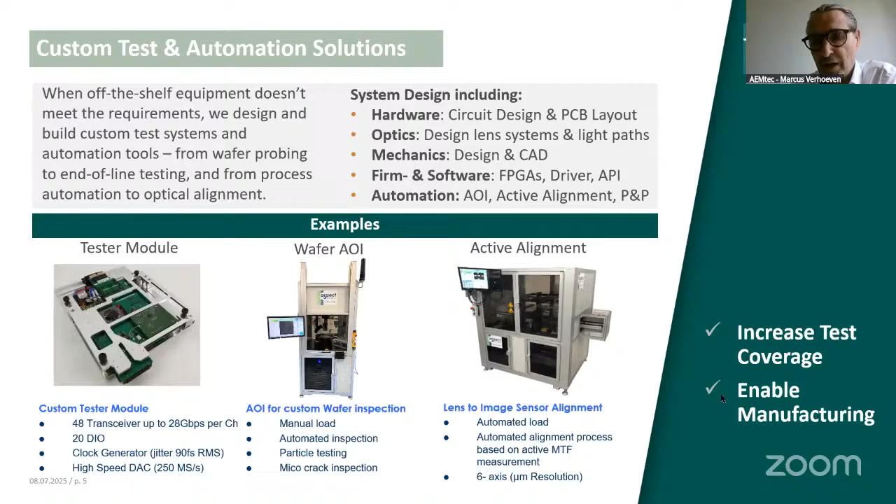This is based on a Bosch conveyor system. So on this conveyor, two components come along, a camera board and the lens. Within this machine, we pick these components and align the lens against the camera module. Then there is a gluing process and end-of-line testing, and then it comes on the conveyor out of this system. These kind of solutions are supported to increase your test coverage and to enable automated manufacturing.

Next area is engineering services. So we help our clients to develop their products. This could be just in the area of firmware development, but quite often we help clients with new ideas. In this example here, our clients had an idea to realize a new detector system for proton therapy, and it's a huge data rate we have to handle. In the overall system, we have 24,000 strip detectors. Each is sampled with 1 gigasample per second. So aggregated, we have to deal with 24 terabits per second. It's not possible to transfer this amount of data directly into the PC.

So in these kind of development projects, we realize all the necessary PCBs, the mechanics, the chip-on-board technology. We debugged and wafer tested the ASIC. You cannot see, it's below this metal bar here. And then all the necessary firmware to extract the raw data and transfer it to the PC.

Okay, all these design services are to help and enable your technology, and two key focus areas to help our clients here are that we keep an eye on design for manufacturing, that we enable manufacturing with high yield, and also design for test, of course. Okay. The last area is our product.

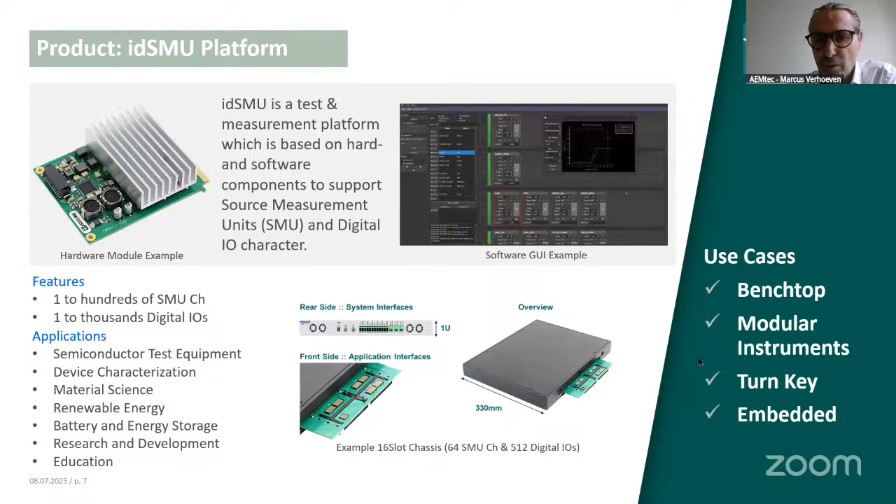This is a kind of baseline in testing, to have these kinds of instruments and a huge amount of channels. So in some test configurations, we have hundreds of source measurement units or thousands of digital IOs. Use cases: benchtop, modular instrumentation, or turnkey solutions. That's it from my side, and I don't know how much time we have to answer your questions.

So yeah, we have time for questions. You can use the chat box or raise your hands. I have perhaps a first question. You mentioned design for manufacturing and design for testing. What's the difference in the concept from your point of view?

So in many areas, when people have new ideas for new products, the focus is strongly on the functionality of your new idea. But when it comes to cost-effective production, these two areas, design for manufacturing and design for testing, are very important, that you take care in your system design that test cost is low.

And when you look at complex assembly processes, if in your design, for example, you go to the edge of the design rules, then the risk of yield loss is quite high. And with the services we provide, we know our technology, and we can help the client improve the design so that you can have cost-effective manufacturing.

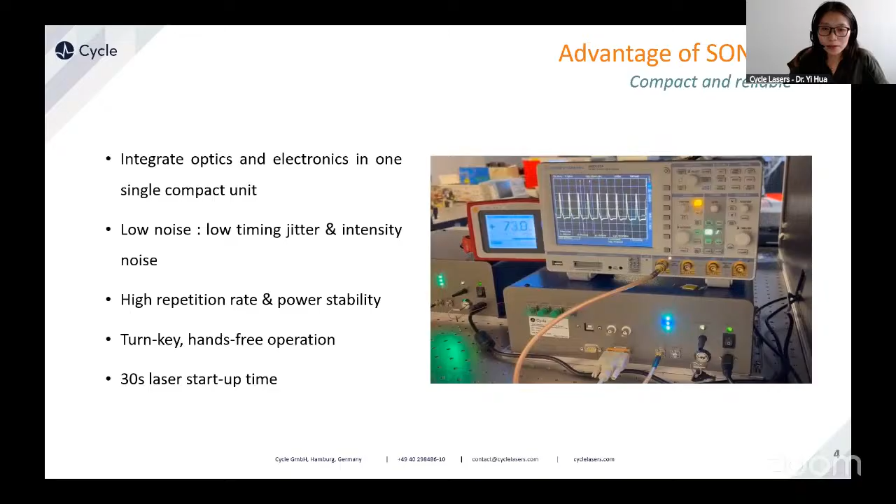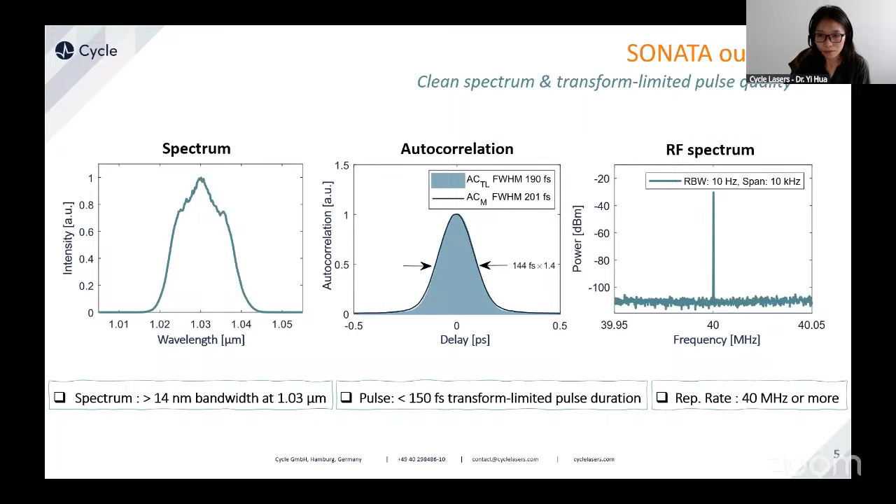Here we do some measurement for the free running repetition rate drift. We use the frequency counter to see how stable the repetition rate is. So we do a logging for 10 minutes. And we find the standard deviation of the repetition rate drift is only 0.3 hertz, which means it's 0.03 ppm at stable room temperature. When I say stable room temperature, actually our lab is plus minus 1 degree. So within plus minus 1 degree, the repetition rate drifts below 1 hertz in 10 minutes.

But if we do longer logging for the repetition rate, it's drifting from 0 to 5 and drifts back to 0. This is most likely due to the fluctuation of lab temperature, but it's within the range of 10 hertz, which is 0.25 ppm at room temperature. And with this very small drifting, the laser actually is very easy to be synchronized and locked to any other lasers.

And here we also measure the power log of the laser output, and we find the power fluctuation is below 0.05% for logging of 150 hours. And for the short-term intensity noise, we measure the laser intensity noise with the signal source analyzer with a fast photodetector. And as you can see, the integrated intensity noise from 10 Hz to 20 megahertz is 0.025%. So this is very low noise as far as I can understand.

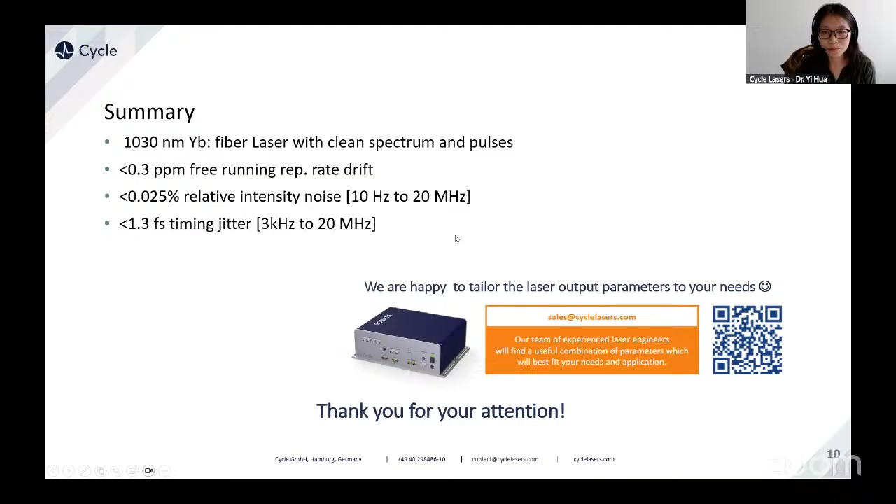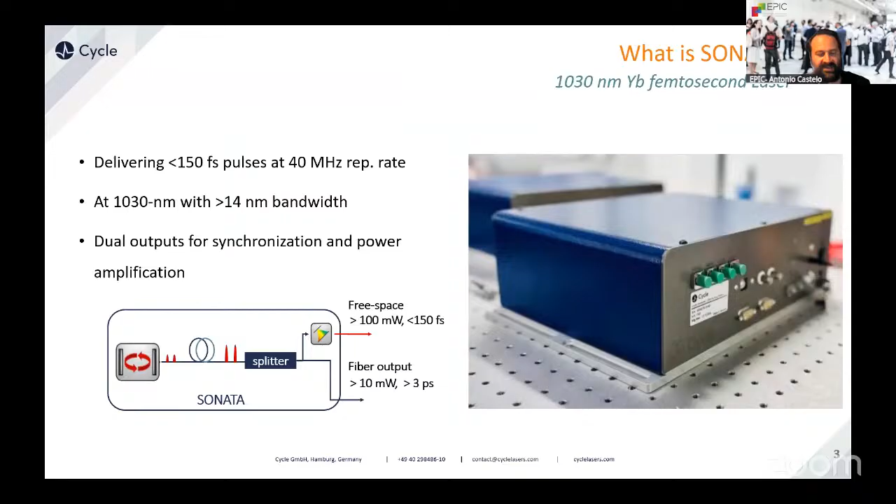I have one question regarding the use of the laser. If you go to this kind of facility with a free electron laser or synchrotron, could your laser also be the substitute of one of the existing seed lasers, or should it be a new configuration where your laser is integrated from the beginning in the, let's say, structure of the whole laser?

No, so for large facilities, usually we have a lot of lasers which are commercial. Most likely we also do our own development for, like, high power pump-probe lasers. But the seed laser is usually commercialized. They use the seed laser for seeding the high power pump-probe laser. But the seed laser can be easily replaced because it is low power. It only offers the power needed to be amplified.

So to switch the laser is not really a big problem, because this is just a small part of the facility which they usually also just purchase from other companies. So this is what we're developing for, because we had some problems beforehand with some laser systems which don't work so reliably, and we are developing timing systems for large facilities, and we also want to have a reliable laser to work together with the timing systems. That's why we need to have a low noise synchronizable laser.

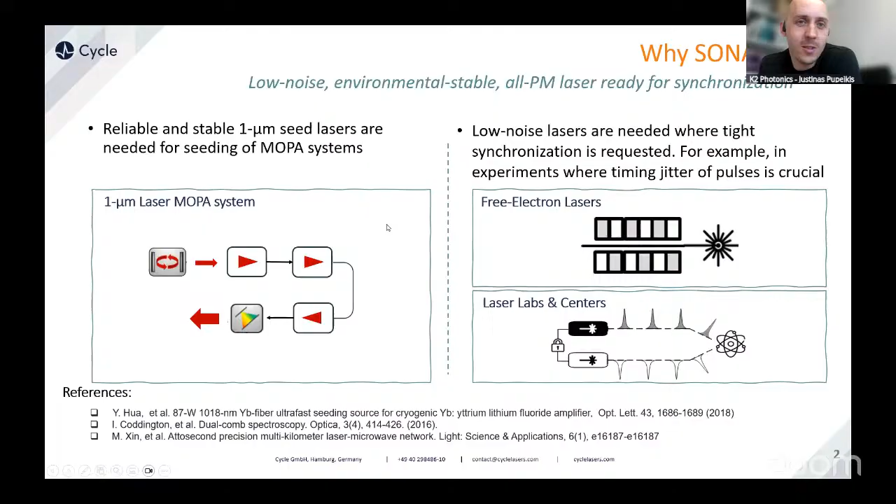So just, what does the application need? Like you showed these noise specs. Is it orders of magnitude too good or not good enough? I'm just curious, where are we standing with this femtosecond? Is it high or low? I would say it's already low enough, but I can't say this is a record low, but you have to consider noise is one perspective.

So where our laser is, I think this is similar to the record timing jitter, but also a lot of publications have attosecond timing jitter measurements, which from my understanding come from the noise floor of the detector during locking. As you can see, there's an S-curve of the balanced cross correlator. Sometimes people lock to the flattened area of the S-curve, which gives attosecond timing jitter, but I don't think this is a real timing jitter that can be measured. So with publications you have to be careful, because some data is not really so trustworthy. But I will say this jitter is already low enough for any application in a large facility.

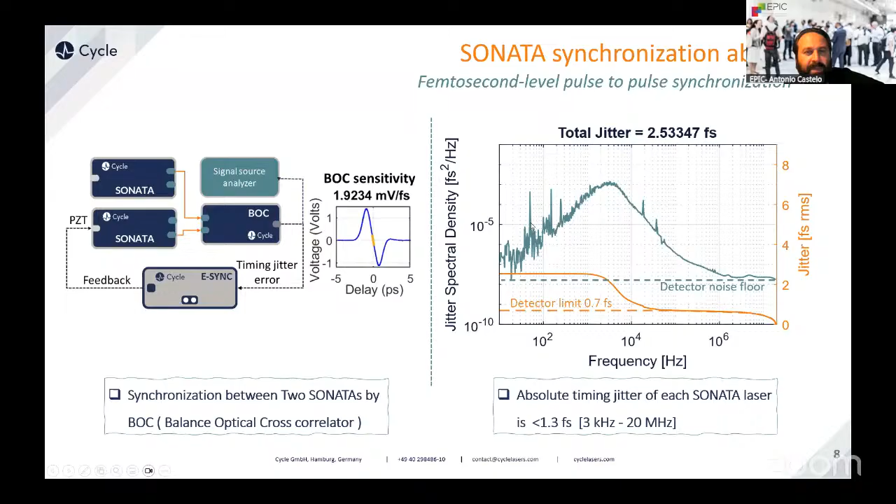So we have Diego Ormaechea. He's a technical sales engineer at Imagine Optic. Imagine Optic is a very well-known company. Adaptive optics is, I think, the key word for them, different metrology solutions. And he's going to present today the MESO solution for planar parallel optic testing. So Diego, the floor is yours.

Hi, everyone. Can you hear me? We can hear you. Okay, can you share your screen and your presentation? I'm trying. Good. Okay, so hi, everyone.

I'm Diego from Imagine Optic, and I will introduce our latest metrology system for optical components characterization. So, a brief introduction of Imagine Optic. We are a French company based south of Paris with between 60 and 70 people, and some offices in China, in the United States, and in Bordeaux. We also have some distributors all around the world, and we are quite proud of two figures. We have delivered more than 2,500 wavefront sensors and more than 100 deformable mirrors for high-power lasers.

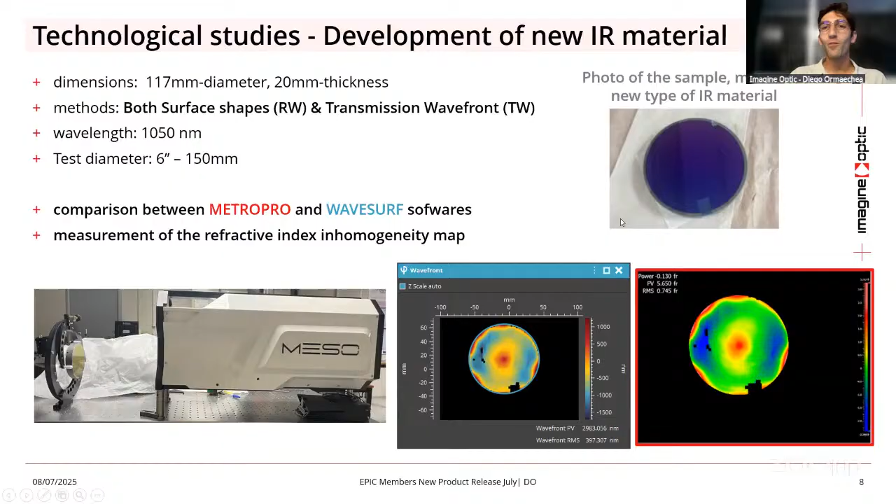On the top right, you can see the sample, and bottom left, the setup. In the middle, it's the wavefront measurement coming from the MESO. We have an export feature in order to get a file compatible with MetroPro software, which is the most common wavefront analysis software. And that's it.

Then MESO can also be interesting for nonlinear crystals and laser crystals after coating. Sometimes you are not able to measure with the standard wavelength of these kinds of Fizeau interferometers. So here we measured small cubic KTP crystals, 9 millimeter square cubes. The wavelength is 1064 nanometers. We can control the polarization if needed, so linear vertical, circular, or linear horizontal.

And for a French laser crystal manufacturer, we developed an add-on to our software in order to measure a batch of different crystals in one single measurement. You can see in the middle the raw camera signal of the measurement. You can see or guess 4 cubic crystals. And in one single procedure, you have access to 4 different wavefronts for the 4 different crystals. So you can measure a high number of crystals with just one measurement.

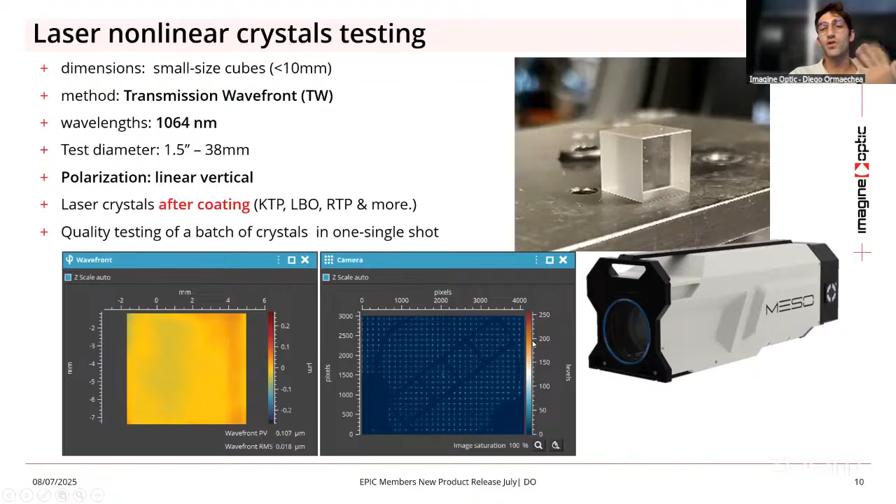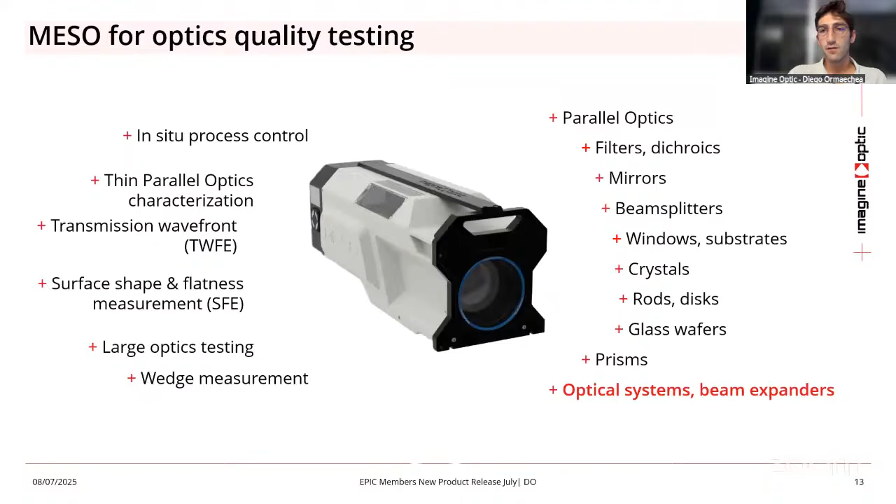That's the idea. Here's a reminder of the features of the meso and how it can be complementary to your current instrument in the metrology labs: insensitive to vibrations, four embedded wavelengths, and this procedure for parallel optics.

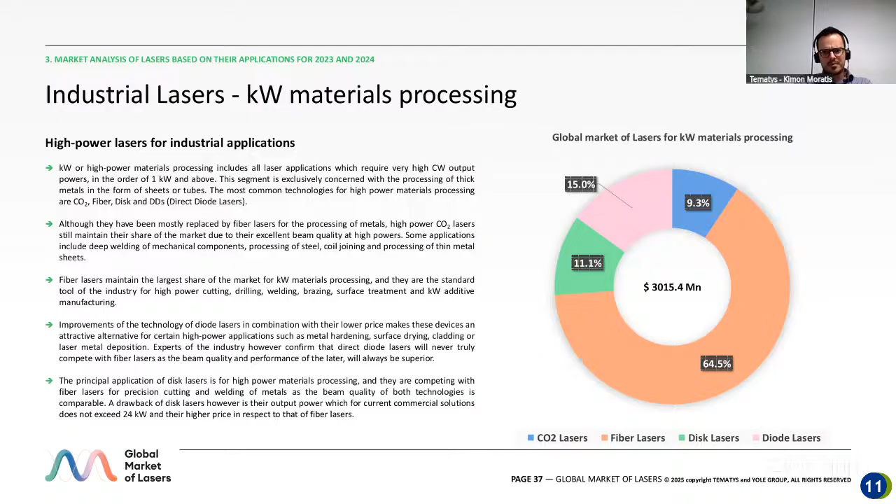In the next slide, this analysis continues. Inside the text, you can find more details about the market of specific subsegments, which are relevant to kilowatt materials processing, such as high power cutting, welding, additive manufacturing, as well as a table that presents the market size in terms of revenues and units sold of each one of these technologies, again, CO2, fiber, disc, and diode for high power materials processing.

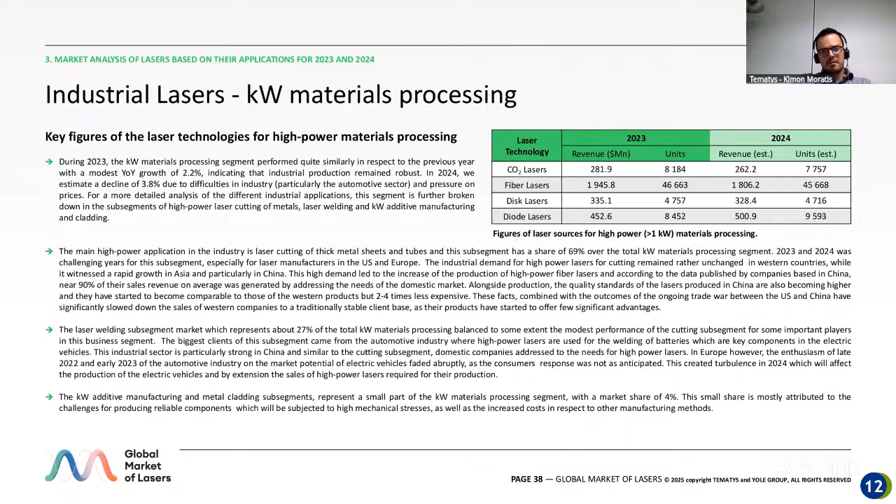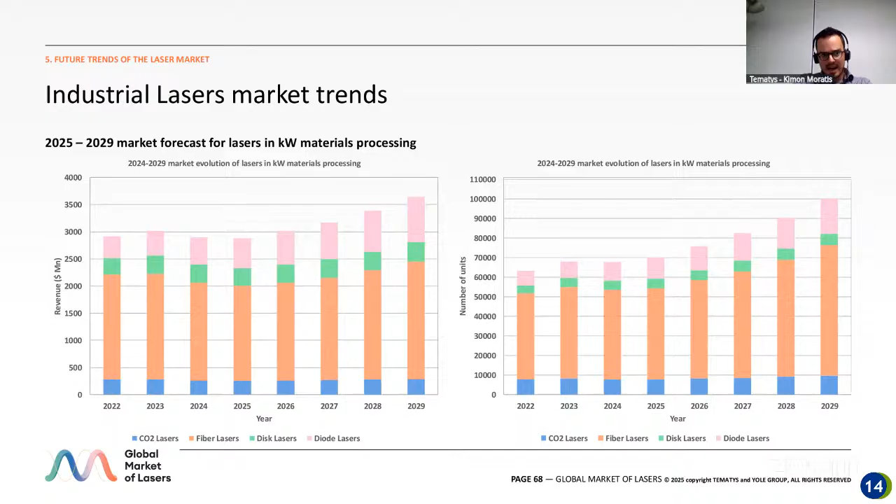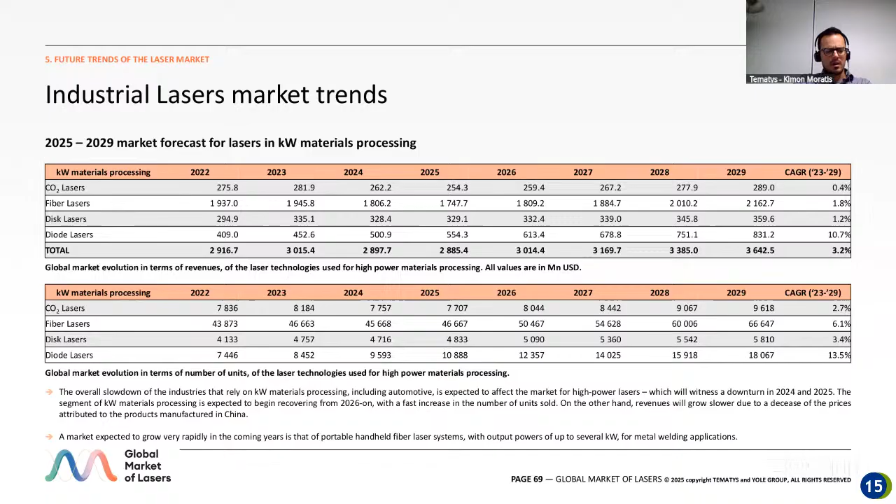In the fifth chapter, we present a detailed forecast for the period from 2025 until 2029. So in the beginning, the report presents these market evolutions visually using bar graphs, again for the market size in revenues and in units. And of course, this is followed by a more detailed discussion showing an array with the exact values. Yeah, this brings me to the end of this report presentation.

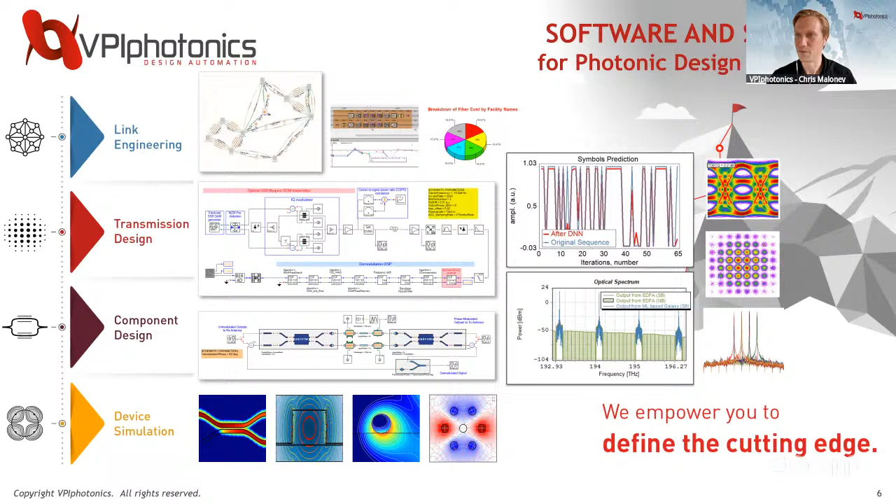I'm actually going to switch over to the software. You can see this is the design environment, and I'm not going to read through all of these, but later on, if you want to pause this, you can see a lot of the new features and application examples in the software. Everything from coherent free space optical laser satellite communications, supporting uplink, downlink, ultra wideband transmission for coherent WDM systems, PAM6 modulation, optical DACs, digital analog converters.

We even are supporting more electrical modeling. So we are now supporting Verilog A models in the software. So for those who are doing electrical optical co-simulation, new capability. And we have a number of new mode lock laser demos as well. And even some new setups with lab equipment from Keysight's AWGs and oscilloscopes. So I'll just show a couple of examples.

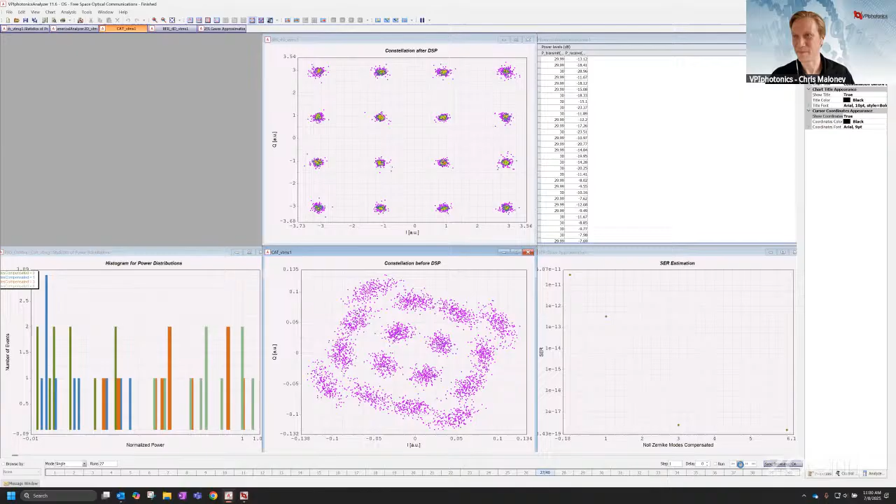If you just want to see an example of the simulation results, you can see your constellation before and after DSP for a number of different simulations. So you can see how turbulence through atmosphere changes your constellation diagram.

Another quick example, new to the software, is this 800G DWDM system. This is really focused on, it's a representative architecture of NVIDIA's new optical circuit switch that is based on silicon photonic microring modulators.

So if you just take a quick walk through the schematic, you can see there's multiple laser channels, so different wavelengths, so 8 different wavelengths in this case. We use this red GUI interface to represent an array of lasers. There's an array of silicon photonic microring modulators as well. Those are connected in series. You have your fiber. You have a demultiplexer over here based on three-ring filters, so photonic integrated circuit components, and then an array of receivers as well.

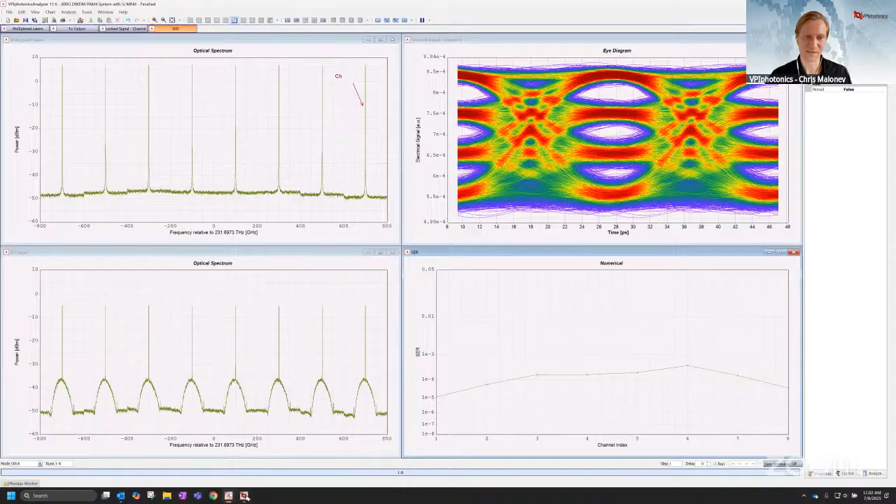So you can do different things like tune your microring modulators to optimize your performance. You can get an idea of some of the results seen here. So we can look at the optical spectrum before and after the transmitter, the eye diagram, and symbol error rate or bit error rate at different channel positions. So I'm going through these quickly. We do have more information on our YouTube channel about these, if you want a more in-depth peek at some of these simulation examples.

Another exciting one, this actually comes from some work from the European project, the ELENA project, where we helped model thin-film lithium niobate modulators and supporting some of the PDK elements that came out of that. This is a coherent system based on optical frequency comb and a thin-film lithium niobate IQ modulator. And so this is really where the excitement is, in this IQ modulator.

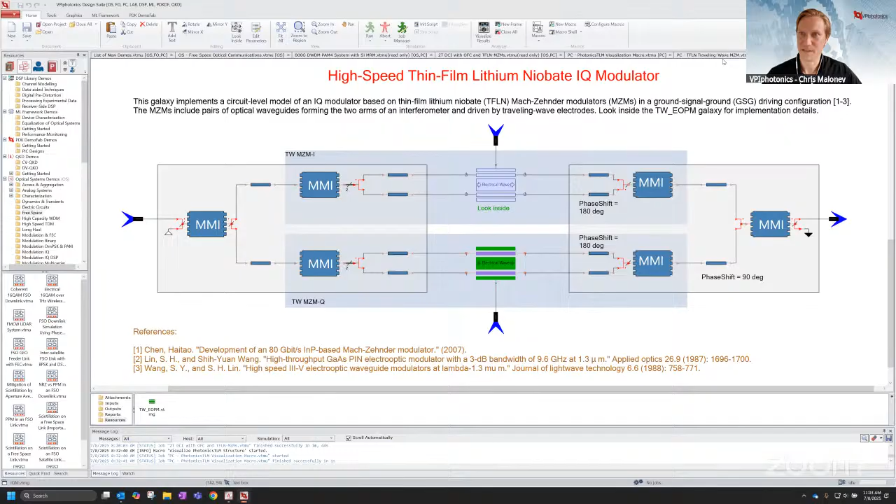If we look inside of that, you can see it's made up of these photonic integrated circuit components, so MMIs being used as couplers, but these electro-optical phase shifters, which if we take a look at this, you can see this is a new element in the software. So the electrode length is actually made up of multiple segments based on measured S parameters. We can bring in those measured S parameter electrical measurements. We can specify load and source impedance and others. So that's a new component in the software that supports the full system level simulation of an optical transceiver.

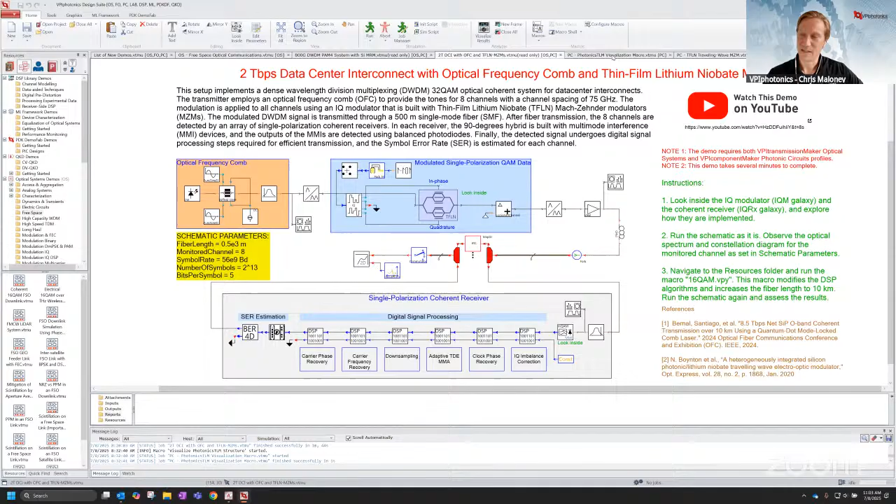And then one more example before I wrap up here is, in addition to all the new capabilities for different technologies, we have basic user interface improvements as well. So one of our active models on the photonic integrated circuit side is the Photonics TLM model. So you can model lasers with these. It's a very powerful model. It includes Kerr nonlinearities. You can investigate carrier dynamics, spatial hole burning, 2-photon absorption. It's a very sophisticated model. One of the challenges with that is that it can also be difficult to use. So we add some ease of use capabilities.

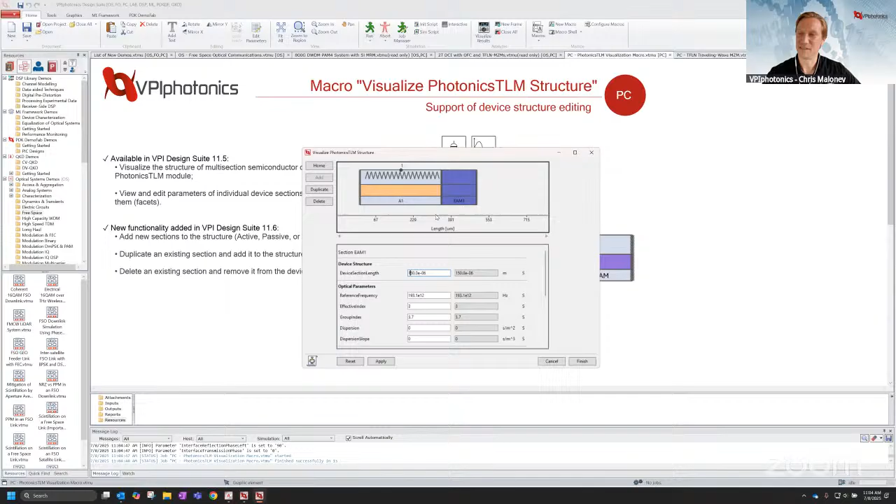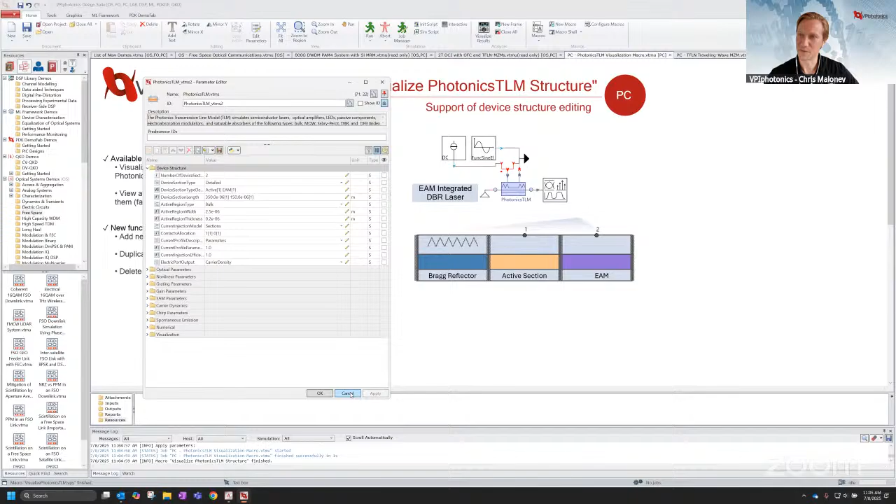This is a multi-section device model. And so in this case, we have an active section. If we want to quickly add an EAM section, we can do that. We can actually visualize the device length as well, update that, and you can see visually what's going on and how you can make those changes to the device themselves. And then when you click finish, all of those changes graphically get implemented within the model itself. So if you actually look at the parameters, you can see if I look at the device section, there's your active section, your EAM. So it just makes this a little bit easier for those who maybe don't have as much experience with it.